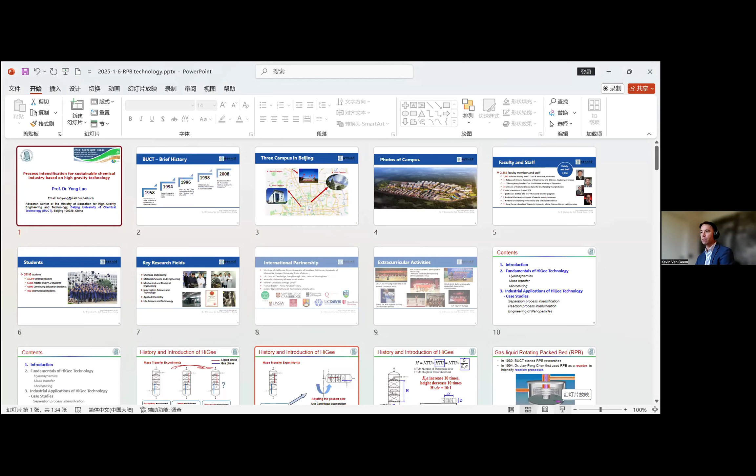Thank you so much, and thank you to the president of EFCE and also the chairman of the process intensification and the chairman of the chemical reaction engineering for the invitation. I'm so glad to have this opportunity to give a brief introduction of this Higee technology at BUCT. I hope that everyone can see my screen and also that the voice is okay for you. If you find that the voice is not so good, just let me know.

Okay, so I will start my presentation. I am Yong from Beijing University of Chemical Technology, we call it BUCT, and my presentation is called the process intensification for sustainable chemical industry based on high gravity technology.

Today I'd like to first take 1 or 2 minutes to give a very brief introduction of BUCT. We were founded in 1958. At that time in China, we call it the 211 program, which means that BUCT is one of the top 100 universities in the whole of China, because in China we have more than 5,000 universities. We have 3 campuses, and the oldest is this East campus here, and this is the photo of our campus in BUCT.

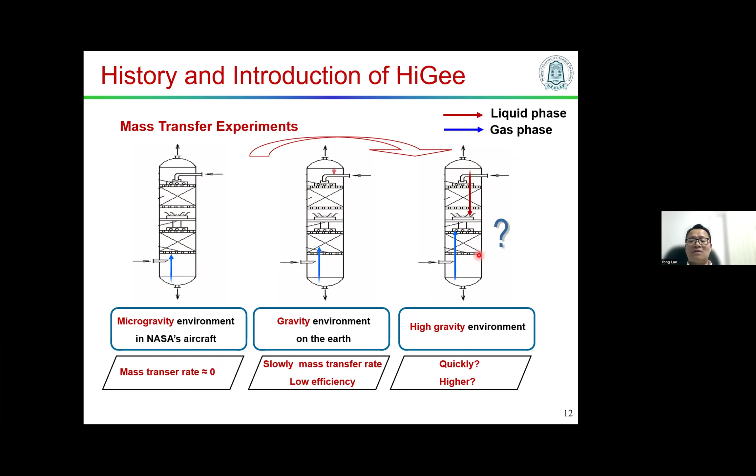Then people started thinking about it. If you could speed up the liquid flow rate or velocity, it means you increase the driving force for the liquid, and maybe you can speed up or increase the mass transfer rate. That is the original idea for the Higee introduction.

So how can we get this high gravity environment? People thought about it: if you rotate this packed column 90 degrees, then fix this column on a rotating disk, it means we can rotate the column. So the liquid will have an increased force, and another force for that is the centrifugal force. It means we can use this centrifugal force instead of gravity force. We call this device the rotating packed bed, shortened as RPB.

In the past, people found that with this RPB device, we can enhance mass transfer by 1 or 2 orders of magnitude. So we call this new technology Higee, meaning high gravity. High gravity is the technology name, but we call the devices RPB.

So how about this RPB, what can it be used for? When we go to the textbook, we find that if you're designing a column, there are 2 very key parameters.

The first one is that we need to identify the diameter. The diameter is commonly determined by the capacity, meaning how much gas flow rate you need in order to design the diameter.

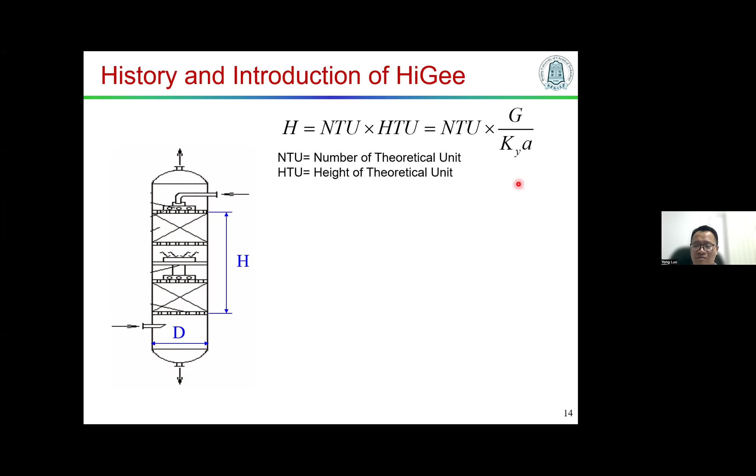We call it KYa. So for these equations, if you can increase the KYa by 10 times, you will decrease the HTU by 10 times. This means in the RPB, if you can increase the KYa, the mass transfer coefficient, by 10 times, you will decrease the HTU by 10 times, so the height H will decrease by 10 times. It means where you need 10 meters height in a conventional column, the RPB only needs 1 meter.

So it means we can reduce the size of these devices. Another thing is if we can increase it by 100 times, maybe you can decrease from 100 meters to just 1 meter. So this is the way to do the calculation, the principle of this RPB - why this RPB technology, this Higee technology, can decrease the size of the devices.

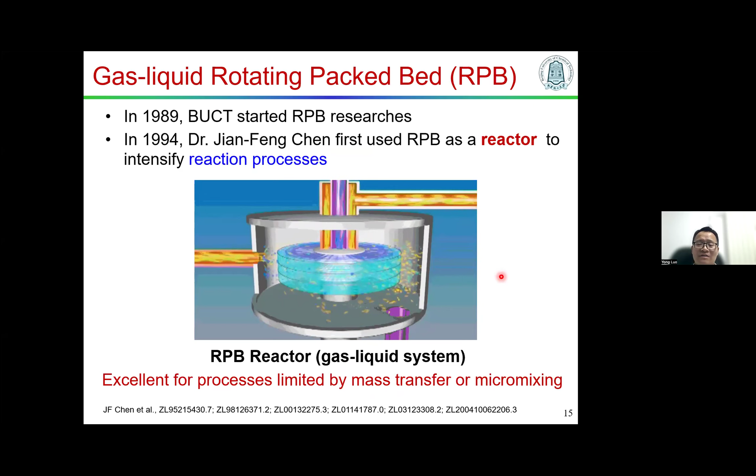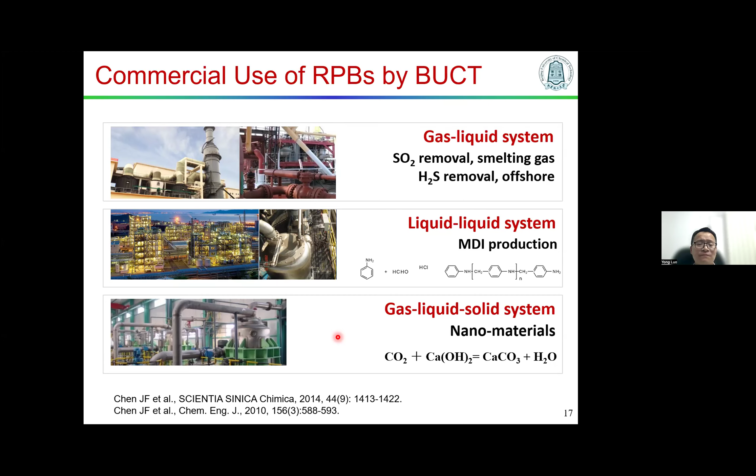I'll spend a little time going through the fundamentals of this Higee technology. Any technology takes time to go from the lab to industry - typically at least 8 to 10 years. This Higee technology at BUCT was the same - it took almost 10 years of fundamental research covering hydrodynamics, micro-mixing, mass transfer, and reactions. BUCT has published more than 600 papers and holds 115 patents on this.

We use high-speed cameras to look inside the packings and see how the liquid breaks up into liquid film, liquid ligaments, or droplets. We also calculate the size of these droplets and study the distribution of the liquid droplets.

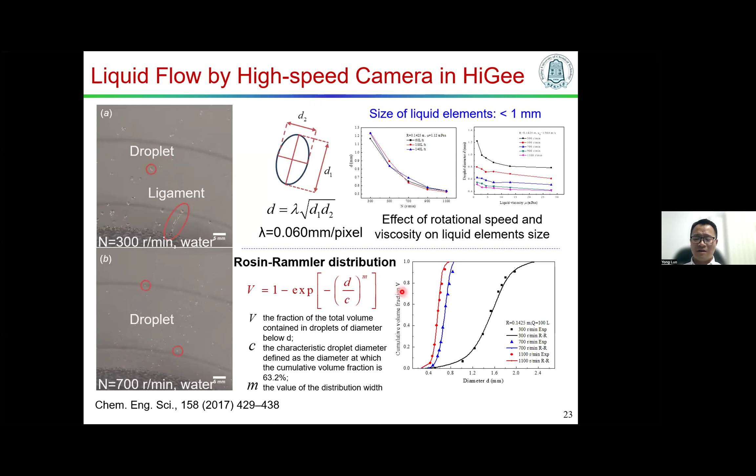Because the RPB has rotating characteristics, sometimes conventional technology can't show us what's happening with the liquid at the inlet. So we use CT X-ray to look inside and see how the liquid is distributed, getting data on liquid distribution and liquid holdup.

Another thing we do is use CFD to simulate the liquid and gas flow inside the RPB, which gives us pressure data and helps us find special phenomena.

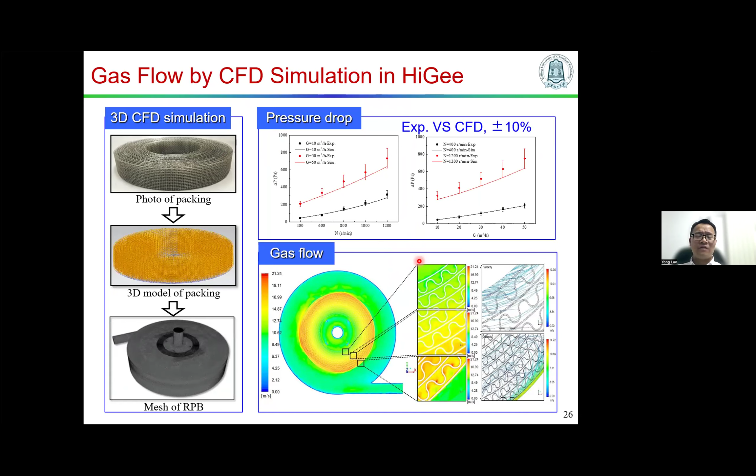For the mass transfer models, we divide them by viscosity into three models: for low viscosity, we use droplet models; for medium viscosity, we use surface renewal models; and for high viscosity, we use film models.

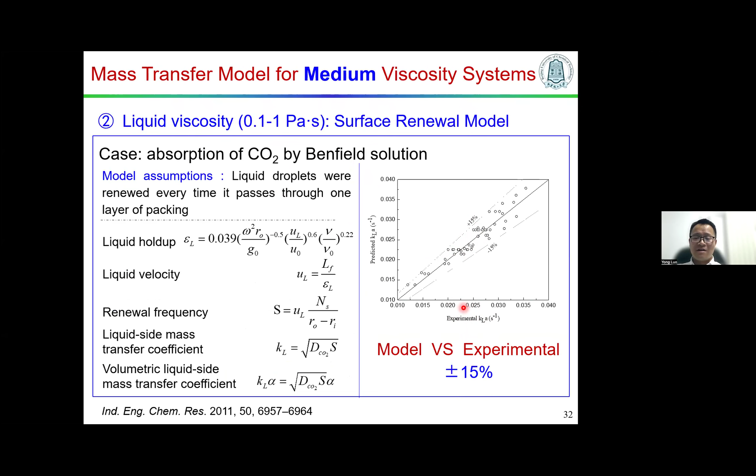With low liquid viscosity, like in CO2 capture, we use droplet models and the deviation is about 10%. With medium liquid viscosity, the deviations and errors are a bit bigger. And with high viscosity models, the errors are even bigger than that.

I'd like to say, regarding viscosity of the fluids - sometimes we can get very correct physical and chemical properties and parameters, but sometimes we use correlations to calculate viscosity, density, and other things. Even when treating high viscosity liquids, these properties can change a lot due to rotating motion and shear force. So viscosity changes a lot, and density too - any physical parameter can change, leading to higher errors.

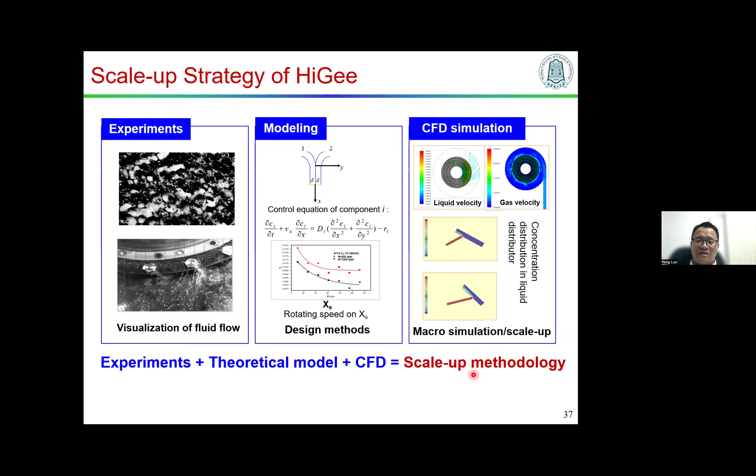We are also building micro-mixing and reaction models to build reactor models. I think the fundamental research is most important for scale-up, because if you want to go to industry, you need the know-how to scale up the RPB and design RPB reactors or separators that fit industry processes and meet requirements.

So now I'd like to share some industry applications of Higee technology - cases in separation, reaction, and also nanoparticles. First, let's look at the application in separation processes.

For this RPB or Higee technology, the first application was a 1983 paper on a pilot test using RPB for continuous distillation. But there they used two RPBs to finish the continuous distillation, because one RPB handles the stripping and one handles the rectification.

Using two RPBs to replace one column was a concern for people, because you have a lot of connection pipes and valves, and you need to be very careful with the control. So BUCT in 2006 thought about using one RPB with multiple rotors for continuous distillation.

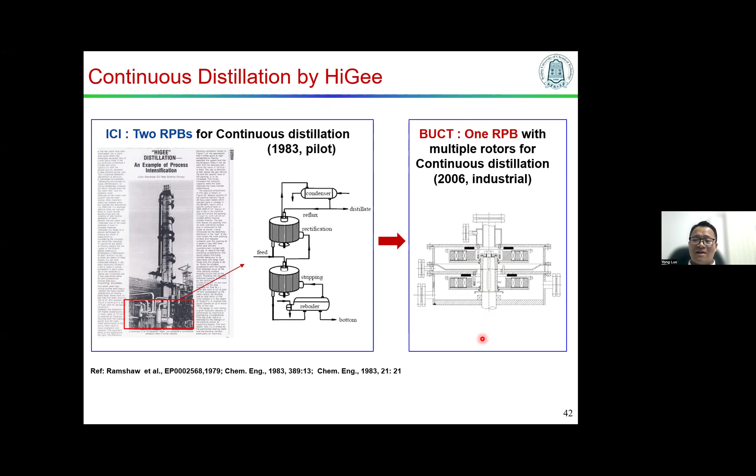I also know that another university in China, Zhejiang University of Technology, invented the RZB also for distillation. Both of us use one RPB to replace one distillation column. If you use one shell with multiple rotors, clients will accept this technology much more comfortably, because it's still just one device, similar to the conventional technology being one device.

We also see, I don't know if this is a conference paper or academic paper, from 1997, where people wrote about a vision from the UK that maybe by the 2010s we could put all the big columns inside houses.

So I think at BUCT, we really put this RPB inside houses, so the dream came true.

Here is the conventional column that we replaced with a very small RPB. The orange column's height is almost more than 21 meters, but our RPB is only about 3.6 meters in height. We used this for methanol-water separation by continuous distillation, with a capacity of about 50 tons per day.

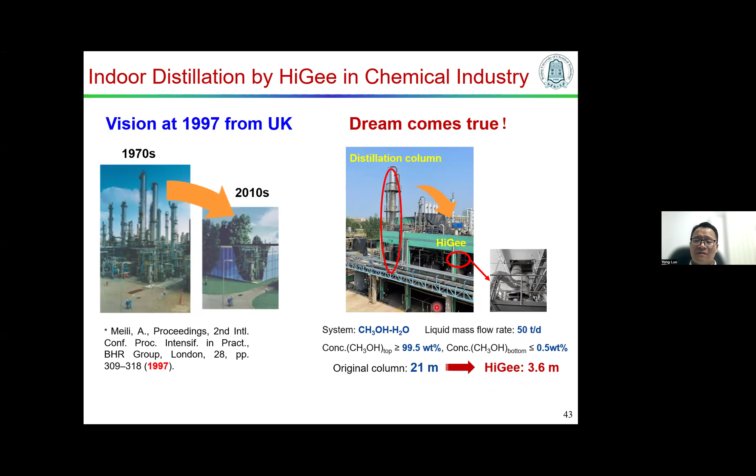We also make a lot of these skids, which we call RPB distillation skids, for clients. Because the RPB is small, you can do the fabrication entirely in the fabrication shop to build a skid, then just transport the skid to the factory to finish installation. This way we save a lot of money on transportation, fabrication, and installation.

Imagine building a column on site at a chemical plant—because the column is very big and tall, sometimes you need to fabricate it on site just to save the transportation fee. But for this RPB, it's very easy for us. We only need to do the fabrication and commissioning in the fabrication shop, then ship it to our client.

Even for this RPB, because it's much smaller, the liquid hold-up is also smaller, so we can decrease safety issues since liquid hold-up decreases a lot.

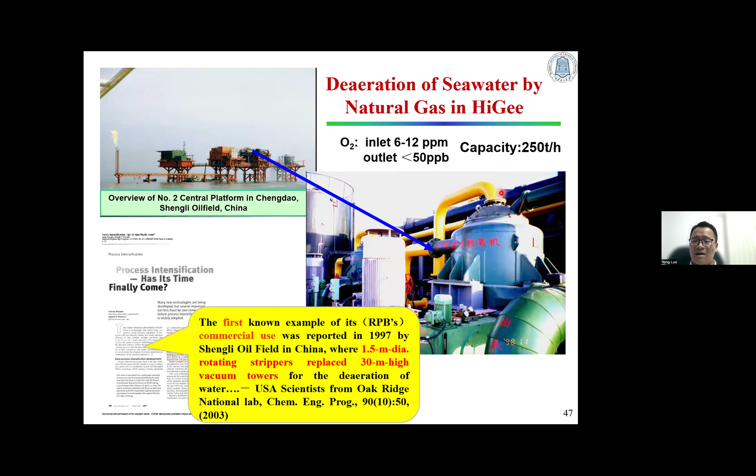Later we also did some projects with 500 cubic meters per hour, meaning 500 tons per hour of seawater. This was also for removing oxygen from seawater, used for an FPSO, with the RPB removing oxygen from the water for EOR.

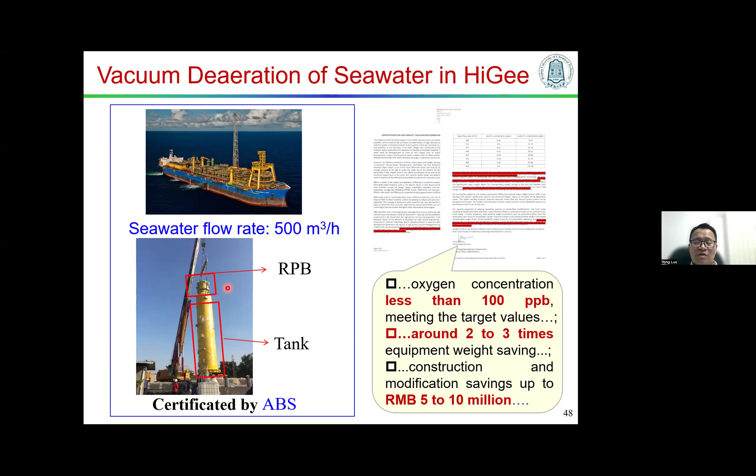Another case is that we used an RPB offshore to remove H2S from natural gas.

In China, in the past, people were burning coal in the north of China. But in order to protect the environment and the air, the government asked all the people to burn natural gas instead.

So it means in China, all the state-owned companies should recover all the natural gas, because we don't have so much natural gas. We even buy natural gas from Qatar, Russia, America, and Australia.

But right now, the government asks all the people to recover this natural gas. To do that, you need to remove H2S, remove CO2, remove water, and do a lot of purification. Then you can get this natural gas.

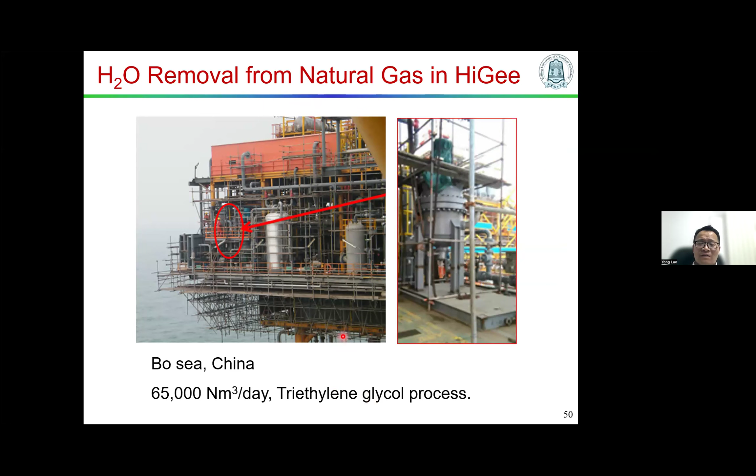We also use RPB for water removal from the natural gas. This is in the China Bo Sea, and we use the TEG to remove water on these platforms.

One month ago, I went to this platform because this RPB has been used for 8 years, and the client wanted to do some maintenance. So I went to this platform - you see here, these are some rooms used for people to live, and here is the helicopter platform, and our RPB is installed here.

Okay, so this is here.

Just say 3 more minutes if it's possible. Okay, how many minutes left? 3. 3 minutes. Okay, yeah, yeah.

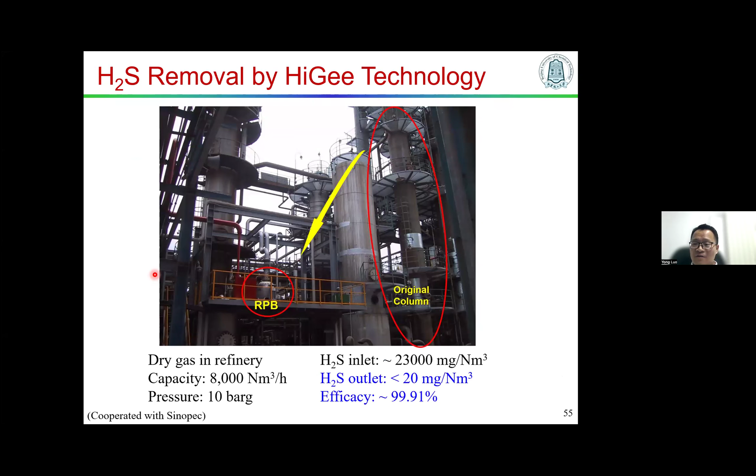For the reaction cases, I can give you some examples. The first one is the MDI reactions. We use RPB to do liquid reaction with condensation reactions for these processes, and we put this RPB in the plant.

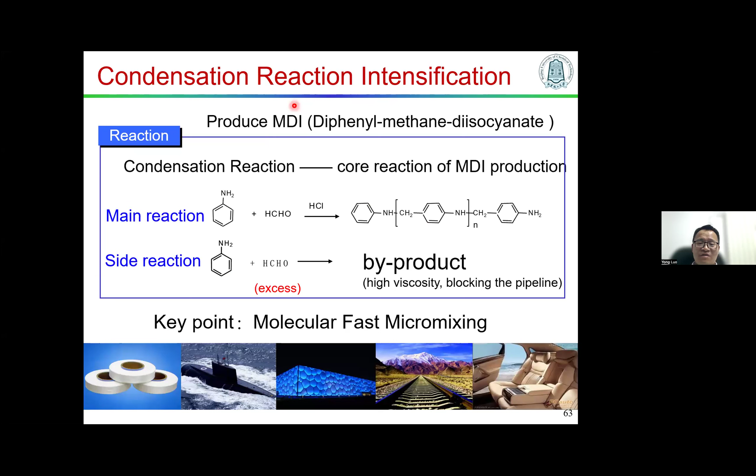They have 1 million tons of MDI products. This is the product using the RPB technology.

Another one is for LPG sweetening technology, where we use the RPB for these processes, and we've put it into commercial use.

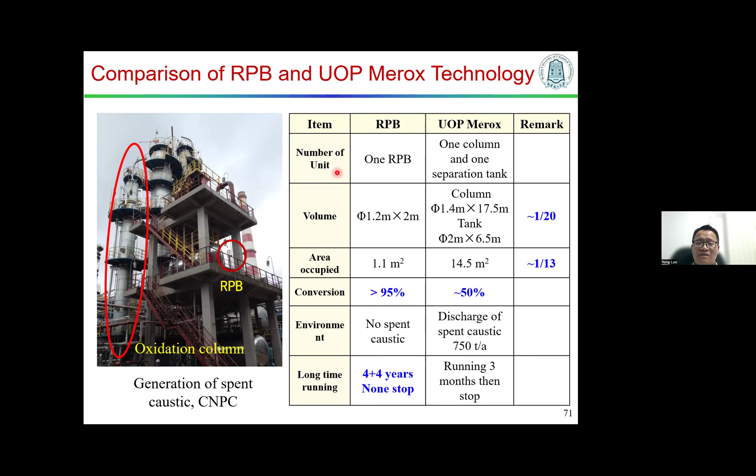We also did some comparison with RPB versus this UOP Merox technology. We use one RPB, but Merox used one column and one tank, and we think the volume is greatly reduced with our approach.

We got some promotion using the line intensified scale-up RPB in this refinery process.

Some nanoparticles - I think this one people may not care about as much - we also use this RPB to produce these nanoparticles using Higee technology.

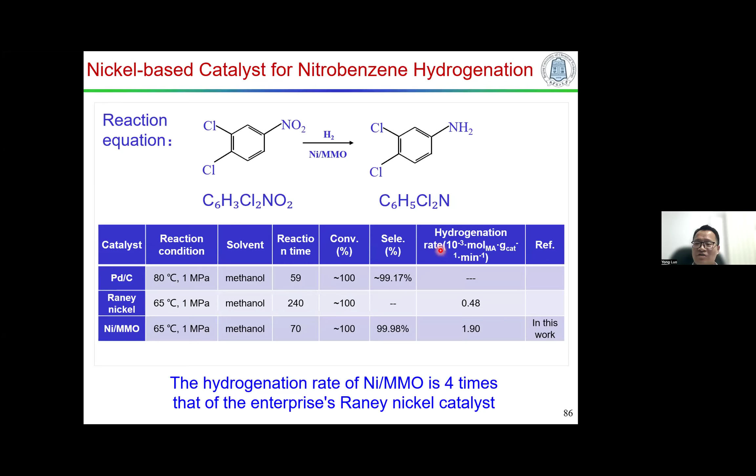We also do some work with zeolites, VPO catalysis, and hydrogenation catalysis for that.

So the last information is about CCUS. We do a lot of things with CCUS, using RPB to replace the column. We have lab scale, pilot scale, demo scale, and commercial use of these RPBs. Until now, BUCT has around 200 industry application cases across all different kinds of processes.

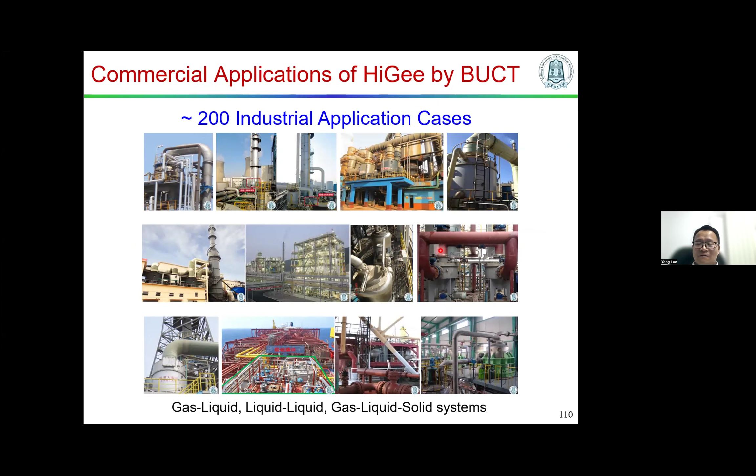Thank you for a very nice presentation. We have a question in the Q&A part: what is the comparison of operating costs for a rotating packed bed compared to a conventional column? For example, if you compare for CO2 or H2S applications, what is the difference in cost?

So CapEx, okay, thank you chairman for your question. For the operation costs, I think we can give the example of CO2 capture. Because for this RPB, you can shorten the size and volume of these devices, which means you can reduce the liquid holdup inside. So if you use MEA, you can reduce a lot of that solvent. But this is the fixed investment, not the operation costs.

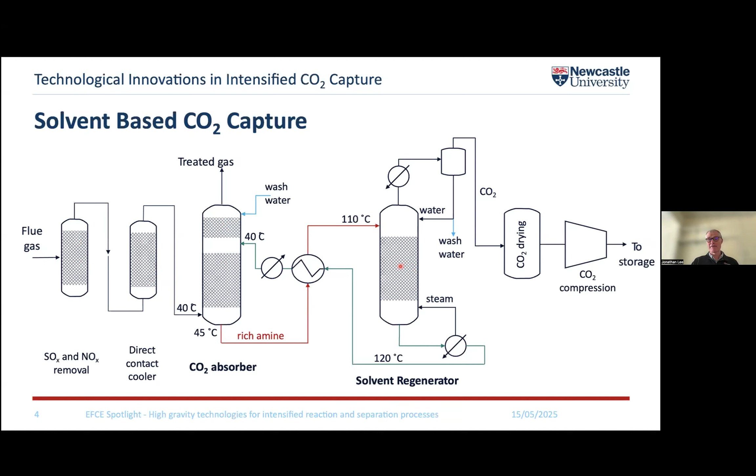These are all packed towers. The flue gas pretreatment, the absorber, the water wash, and the desorber are all packed towers. Therefore, if you want to intensify a solvent-based CO2 capture process, you're looking at using rotating packed beds to replace all those packed towers.

So for the last 11 years, I've been working with a company called Carbon Clean Solutions, based in the UK but now quite international. They have now got commercial processes—they call it Cyclone CC. This is the 10 ton per day unit in the picture there. Basically, that 10 ton per day Cyclone CC intensifies the absorber and regeneration columns. The gas pre-treatment and water wash are done in conventional columns on this particular process, and you can see those in the background of this plant. But that is commercial—Carbon Clean have sold commercial units besides building this 10 ton per day test unit.

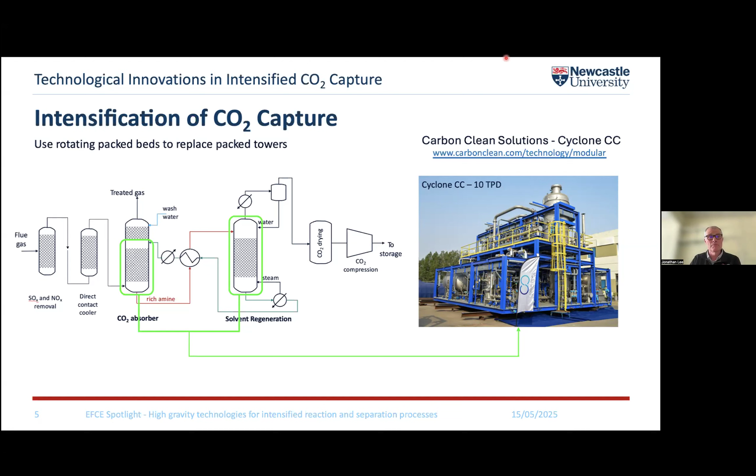Now they're moving on, developing this Cyclone CC technology further, where they intensify or use rotating packed beds to replace all the packed columns in a carbon capture process. And actually just today, they've made an announcement about this process and the successful testing of some of the RPBs for that—if you click on the link, you'll get there.

Now, there are some other players in this market. Baker Hughes have got a development of rotating packed bed technology from Norway, and they've actually intensified or used rotating packed beds for the absorber and water wash. They've also got a design for solvent regeneration which integrates the reboiler into the regeneration column, and I'll talk a little bit more about what we're doing in that area later on.

This is a cross-flow RPB, so it's not counter-current flow where the gas and the liquid are flowing opposite directions. The liquid still flows in the same direction as it does in the conventional rotating packed bed, but the gas flows across the packing, which allows them to basically build the absorber and the water wash into a single unit.

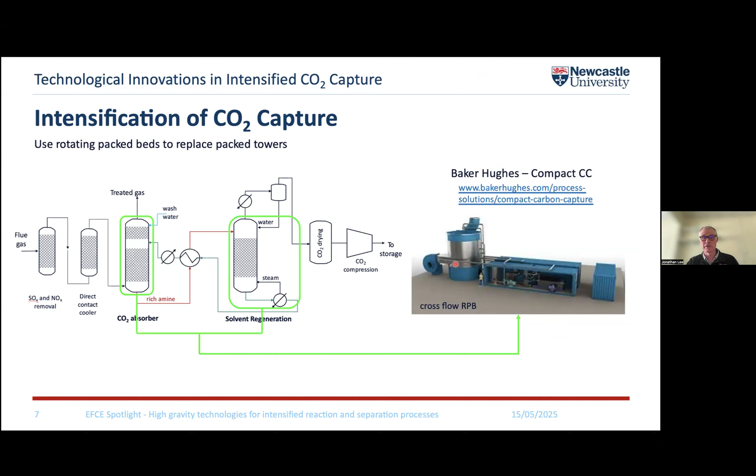And then finally, I'll talk about a project that I'm currently involved in. This is a European project called Higee Accord, and we're basically intensifying the absorber, and we've got the solvent regeneration column, which we're intensifying, and we're integrating the reboiler into that intensification. There's a picture of it on the right—it's being built down in Yorkshire in the UK. If you click on the LinkedIn symbol, you'll be able to see a time lapse of it being built.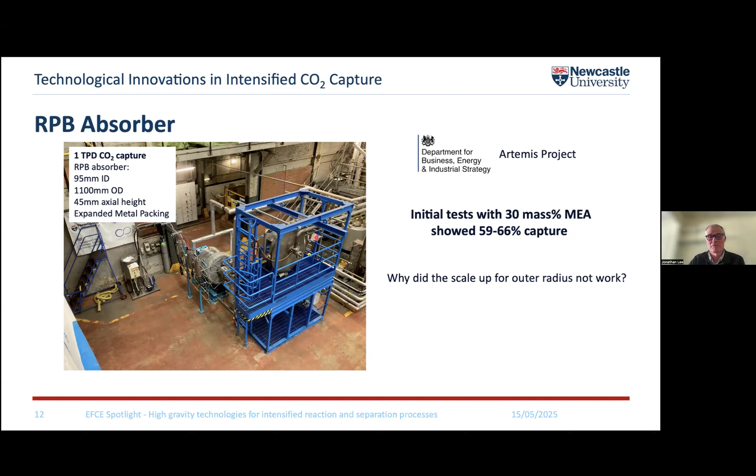So why did that scale-up for the outer radius not work? I'm going to make reference to work coming out of Beijing here, because they have done a lot of measurements. There are three mass transfer zones within an RPB: the entrance or end zone, where the liquid comes in; the bulk zone, which is the rest of the rotating packed bed; and the cavity zone, where the liquid leaves the rotating packed bed and flows across to the outer wall of the casing.

Measurements indicate that the mass transfer rate in the entrance zone is at least 4 times higher than the mass transfer rate in the rest of the rotating packed bed. So we've got this very intense zone of mass transfer right at the entrance. In the cavity zone, the mass transfer rate may be slightly higher, but it's generally around about the same rate as the bulk zone.

And the reason for that very intense mass transfer in the entrance zone is because the liquid jet is impacting onto the rotating packing, and that jet is being fragmented as it collides with the rotating packed bed. That's what gives us the very high rates of mass transfer in that entrance zone.

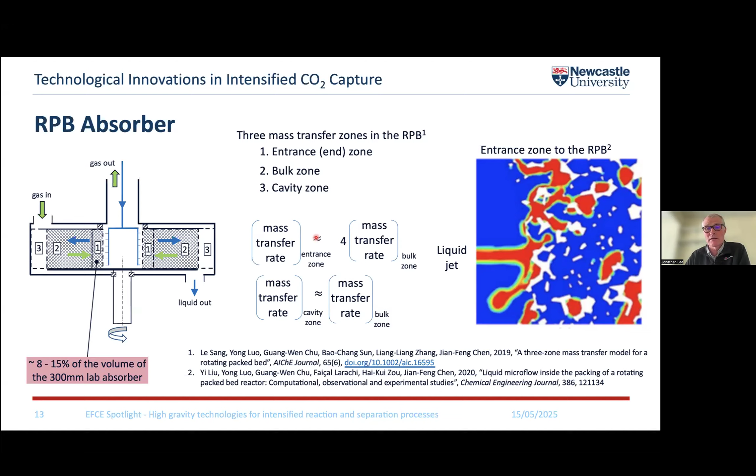This is a very approximate calculation, but we think that in our 300 millimeter diameter lab scale absorber, the volume of the entrance zone is about 8 to 15% of that rotating packed bed. So that entrance zone is having a significant effect on the measurements we take from that small scale rotating packed bed.

The other thing that's going on in this CO2 capture process is basically the reaction between the CO2 and the amine. So there are two sets of reactions. One is where the CO2 is getting transferred to the solution, which is the mass transfer process, which is very fast.

We have the amine reacting with the CO2 in solution to give us a carbamate and water, and that's a very fast reaction. The amine is also helping to catalyze the mineralization of the CO2 by making the environment alkaline, and those are still very fast reactions, but slower than the carbamate reaction.

When we did our work to develop our correlation for the rate of CO2 absorption, we were working with amines at low loading, so we were seeing basically carbamate formation dominant, and the rate of reaction was much faster. If you look at the overall mass transfer coefficient, it has a gas film element and a liquid film element, and the expression for the liquid film reflects the enhancement caused by having a reaction going on in the liquid phase.

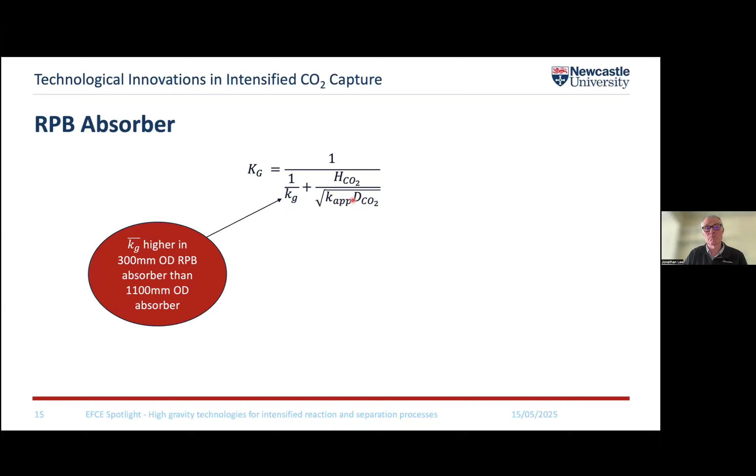So Kg is the film mass transfer coefficient, and k app is the apparent reaction rate. In our 300 millimeter absorber, the average mass transfer coefficient was higher than we'd see in the 1100 millimeter absorber, and the reaction rate is also higher. Those two things together mean that the data we used to scale up to the 1 ton per day CO2 absorber underestimated the outer diameter, because we were overestimating the overall rate of mass transfer.

Now, the project to scale up to 1 ton per day was a commercial project, driven by a company, and they don't want to accept 60% capture. So we had to think of something, had to change something to try and get to 90% capture.

So we used some work published from Germany in 2021, looking at the liquid distribution in a rotating packed bed. On the left, this image shows the liquid in red, its volume fraction as a function of radius, for a packing whose porosity is constant, so the pore size is the same throughout. You can see we get good liquid distribution, but the volume fraction of liquid decreases very rapidly with radius.

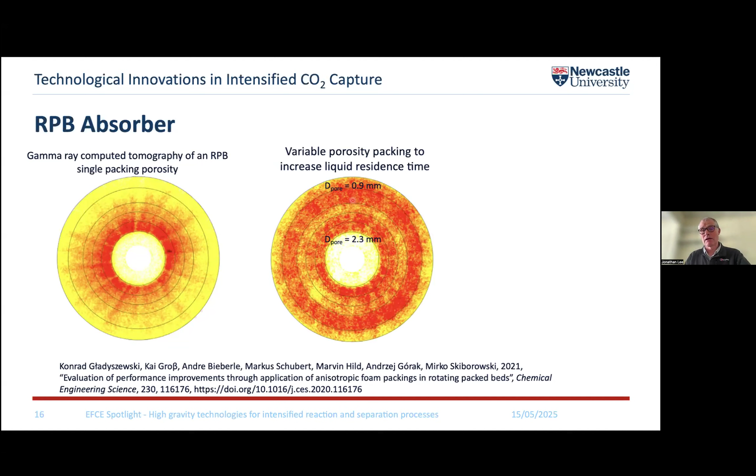If you do that measurement again but use packing that has variable porosity, where the pore size goes from 2.3 millimeters down to 0.9 millimeters, then as you decrease the pore size you hold up more liquid in the packing. That gives you more residence time because you're slowing the liquid down. So working with Montz, we developed that variable porosity packing.

You can see the picture of the rotating packed bed on the left and right here. Here's some data taken from the 1 ton per day scale absorber. The orange line is when we're using the Expamet, and the blue line is when we're using the Montz variable porosity packing. You can see the Montz packing gave us a greater percentage of capture, because we've increased the residence time.

Now, we still didn't get to 90%. This is with 30% MEA solution. We were doing this project with Carbon Clean, and they have a solvent called CDR Max, which is kinetically faster than MEA. So when we used their solvent with this rotating packed bed, we were able to achieve 90% capture, which is what Carbon Clean wanted.

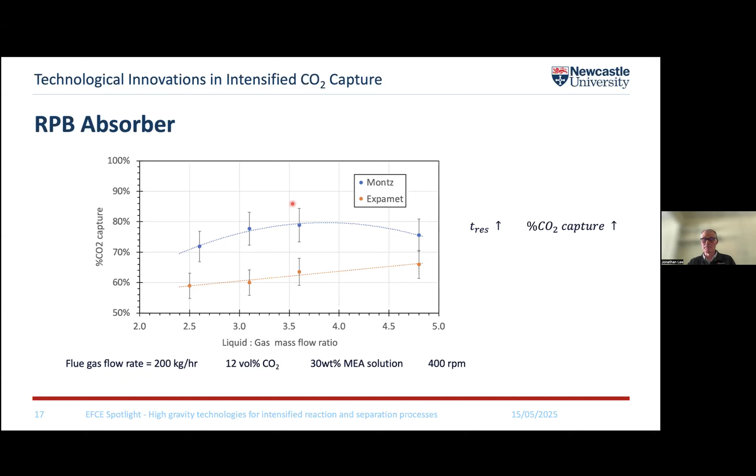These rotating packed beds are 380 millimeters ID, 1,990 millimeters OD, and 185 millimeters axial length. They're being built into a process which will be ready to be tested in Greece by about August this year. Now, you can also intensify the solvent regenerator.

If you're using a rotating packed bed, you can reduce the packing volume by a factor of at least 30. That poses the question: if you've shrunk the RPB, rather than having a separate heater outside to put energy into the system, why not directly heat the RPB rather than having a conventional reboiler sitting out there? So that's what we've set about doing.

So here is a schematic of what we call the integrated stripper and reboiler. You've got a rotating packed bed that is completely encased in metal, sitting inside a metal shell, which is sitting inside a pressure vessel, and the metal shell is heated directly by steam.

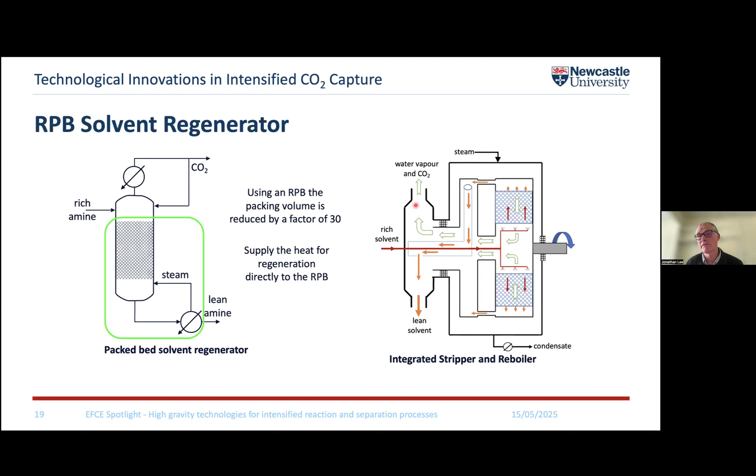So we get size and capital cost reduction due to intensified mass transfer, intensified heat transfer, and integration of the regeneration in the reboiler. And we get reduced energy consumption by integrating the reboiler and the regenerator.

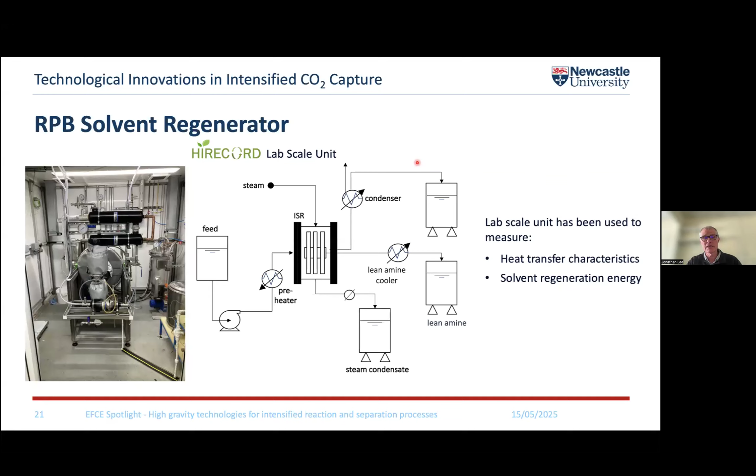So we tested this at lab scale, where we measured the heat transfer to the rotating packed bed and also the solvent regeneration energy. We've developed correlations for heat transfer to the liquid inside the rotating packed bed, doing that for water and for a solution representative of the most viscous amine solvents we might encounter. We also measured the regeneration energy for MEA.

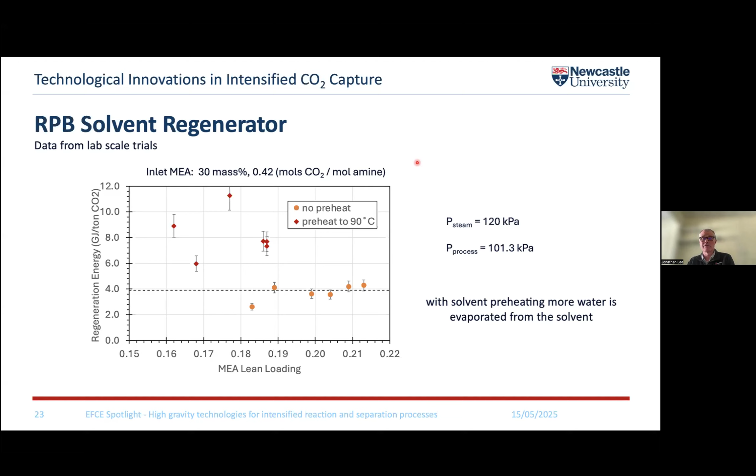But you can see here, the dashed line is what we'd expect the regeneration energy for MEA to be, and we're either on that line or just below it when using the integrated stripper and reboiler.

Basically, we've used that data to scale up, and this is the integrated stripper and reboiler being installed on the Higee core process around April time this year. And that's all I've got to say.

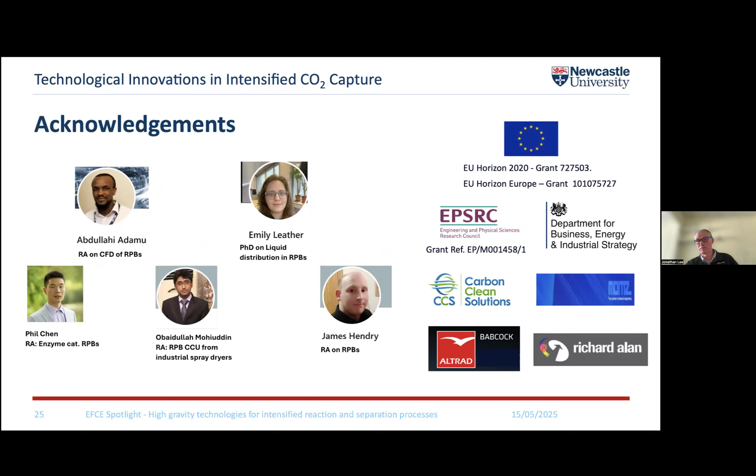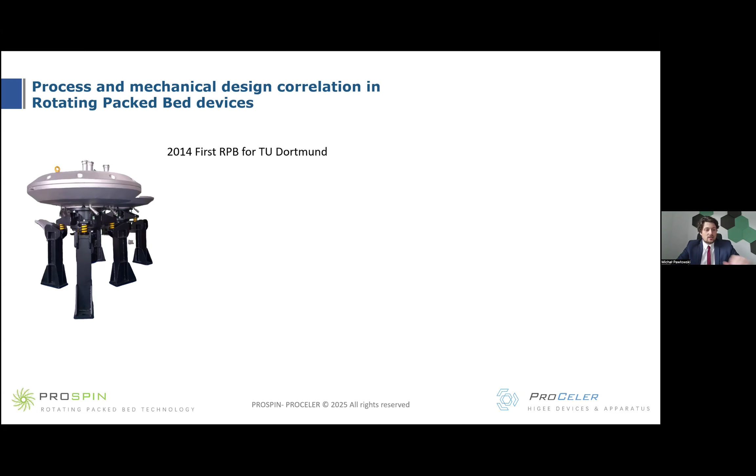Since then, during the last 10 years, I have provided 18 devices, and what you can notice here, I mark by the same color the devices that were designed with exactly the same design. Usually each device is slightly or much different, not only because of mechanical improvement. Of course we get feedback once we design something and see how it behaves in real conditions, and there's influence of mechanical solutions on the chemical process that we can improve. There were also changes in size. But it's very important to find the proper solution for the specific use, specific process, specific chemical system. Especially lab use is very demanding because it's quite universal, which is of course impossible to make all-in-one, but I'm trying to do it.

So, how to design an RPB? This was the first question I asked myself. We can split it into two aspects, not independent, but at the beginning, let's say we have an example of a column. We need to lay it down. Of course we need to revert the dimensions: height became diameter, and diameter became the height of the packing. The height became the length of the packing, but in fact the length is not the radius.

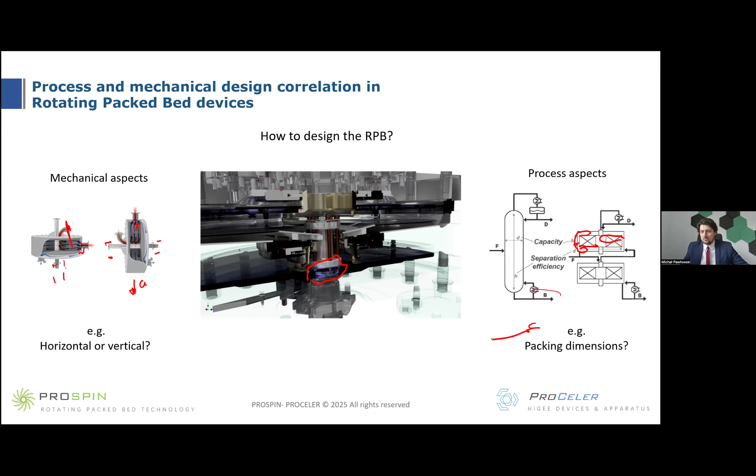So at some dimensions that we came from here, we can think about different arrangements, even in that simple case it might be horizontal or vertical axis. So in general, it has mutual influence with both, and we can investigate and look for proper solutions for specific fields of use.

This is our device that we have in our lab. I would like to show just one thing related to the topic I touched on in another slide. What happens if the drops eject the rotor? It hits here and splashes into some fog, let's say. It depends on rotation speed, on the viscosity of the liquid, maybe some surface tension, many parameters.

So we can have different phenomena, casing phenomena, if we use different systems and even different process parameters. What we can observe, for example, is the creation of a wave of liquid on the casing that is dragged by the gas, by the rotor, and rotates with the rotor. It causes an extreme increase of power consumption and switches off the motor by overcurrent mistake. But anyway, we can use stream breakers like this here.

That gives us the opportunity to drain the liquid faster, but it's not always advantageous. Maybe at some processes, at some parameters, we can increase the liquid holdup in the casing to use the advantages of perfect mixing inside the casing. We have quite perfect mixing, good mixing that we have checked, and it's really good mixing inside. So this is one of the different approaches we can have in different processes.

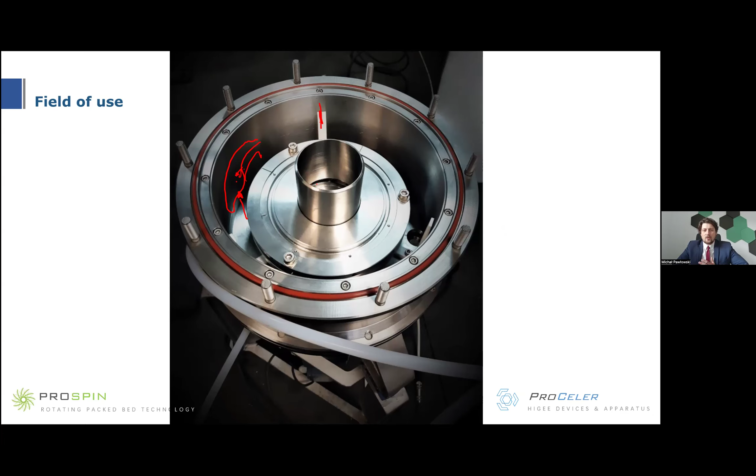What is also important to observe here is that this is a very small device. It has just 100 to 250 millimeters of rotor diameter, and we use it for proof of concept of different processes. Of course, if we look at the big scale process with great absolute amounts of gas and liquid, like absorption of CO2 for example, it's far away from even piloting scale.

But we can make some screening of the solvents. We can make some tuning of the model, a first point of some curves of the model that we built for calculating the packing and efficiency of the process. One important thing here is the packing height, and here is the packing radius. So the volume inside the casing is more than one order of magnitude higher than it would have in normal scale, because we would like to make it smaller. So the relation between packing volume and casing volume in absorption process, especially CO2 absorption, will be opposite.

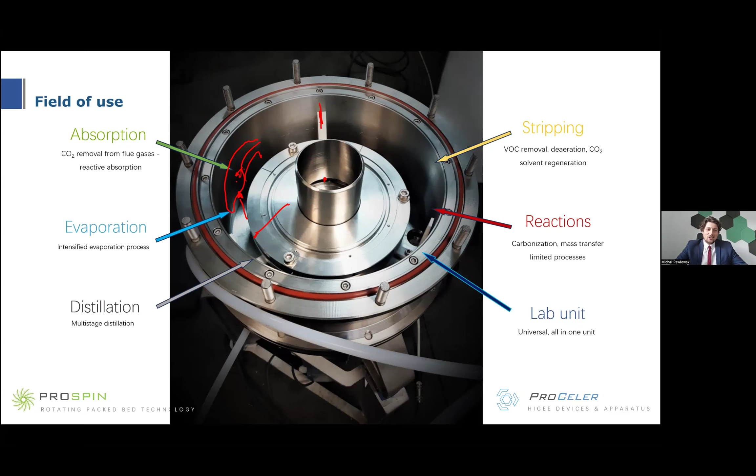Below, I would like to show you some results that we obtained related to absorption of CO2 with MEA. The point is that if we want to use RPB in CO2 capture, it's also worth using RPB as the stripper. This should work in a closed loop, and this stripping RPB will be a completely different device. Turns out it's completely different than the absorption RPB.

What we can observe here is that with similar amounts of flow rates, when we double the flow, we still have the same efficiency of capture in stripping. So this shows some untapped potential in this small device comparing the capture efficiency of CO2. Yes, the device for stripping will be much smaller, as we can observe from the existing installation.

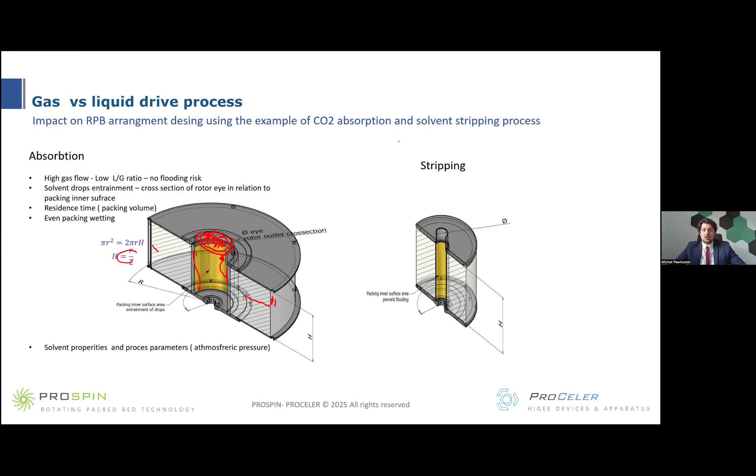What next? It's the solvent parameters and the parameters of the process. It's good to have atmospheric pressure because of the efficiency, in terms of energy consumption, because any compressor will have much higher consumption than the RPB in this installation. There are some topics related with upscaling that I will come back to later.

If we look at the stripping device, we will have about 10% or 5% of gas flow, depending on the concentration of CO2 in the flue gas stream that we consider. We'll have quite a liquid load and risk of flooding at this surface, so we can decrease this area, but we should prevent the flooding by proper RPMs and proper surface area inside.

So when we look at the stripping of the MEA, the length of the packing required is not so high. We get this opposite relation compared to the absorption device, which also gives us the opportunity to put it horizontal. For example, as a disadvantage, the axis will be lower, not so high, but we'll have good access for maintenance.

Of course, additionally, we have temperature, pressure, or vacuum process differences in casing construction, sealing type, and many other points. We need to also think about heat exchange. What we already have is a heat exchanger inside the casing, and we have some solution to also build a heat exchanger inside the rotor that we haven't realized until now, but we are still doing it for serious upscaling.

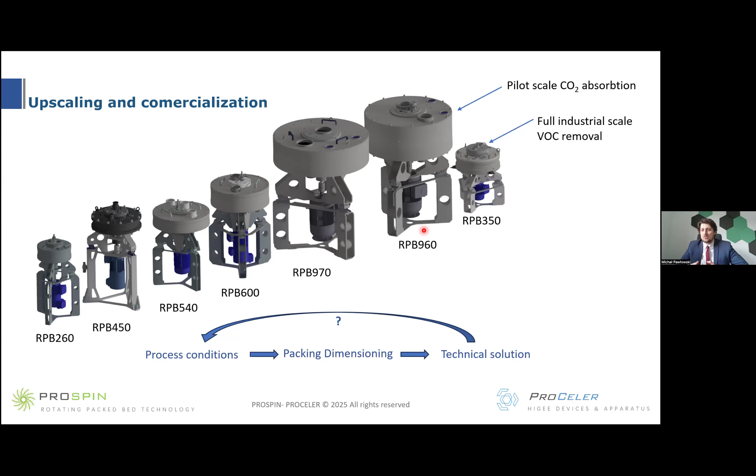This is what we are going to do next month. We are trying to build this kind of device and try it in a real process. It's also an opportunity if we find out there's something under this question mark. It's modular construction, so we'll be able to change it, adjust it, improve the device and adapt it to a process that is not fully known, especially using RPB. This is also an opportunity to convince production guys to use RPB instead of a well-known technology, maybe not the best or most efficient, but still well-known. So that was my idea.

In this scale, RPB for CO2 capture looks like this. It's huge, and it requires a different approach to mechanical design. You can see here that we can reverse it upside down. Here is the motor; opening the lid is rather useless with this tonnage, and we hang a heavy rotor inside. The optimal range for this kind of device will be rather 500 RPM down to 200, depending on the radius, but for this radius I expect something like this. It gives us a lot of questions about the resonance speed of the support, which is also something we need to answer in the mechanical solution.

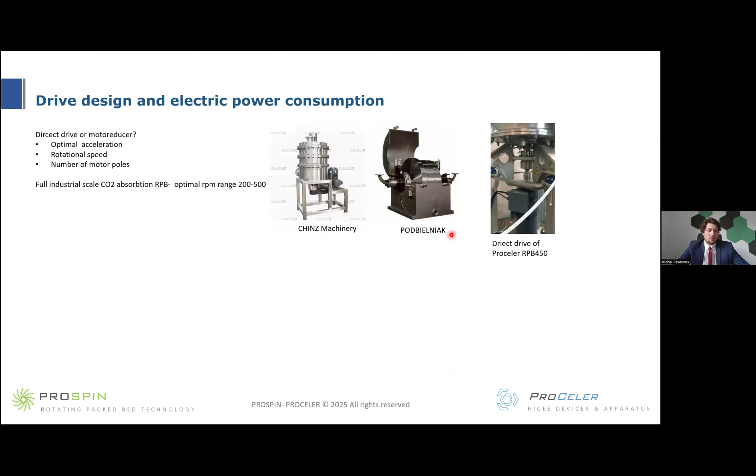One important question, which became most important for the final user, is power consumption, especially in CO2 capture. It's not so obvious how we should calculate the optimal configuration. We know there are some belt transmission RPBs, like this old Belgian one and others. We usually use direct drive, and if we want to go with lower RPM, we can use multiple motor poles, but we need a reasonable number in terms of availability on the market. I think finally we need to think about a gear reducer, but still, what is the power consumption? It's not so obvious. We have a quite well-known equation from TU Dortmund, and it's not so obvious what this factor is - of course it's related to the unit, but this is idle power.

If we take a simple model of energy consumption, which comes from the velocity of drops ejecting from the rotor, we can calculate the energy of each drop. After trivial transforms, we get an equation which is exactly this, in fact. But this assumption assumes that the velocity of the drops equals the velocity of the rotor - which it's not, obviously. It depends on viscosity, maybe surface tension, and definitely on packing type. If we want to build this model and make a correction factor, we should put it somewhere in the radius, which is squared. Because if we observe some radial velocity and smaller velocity in this linear component, it's definitely something that decreases the power consumption.

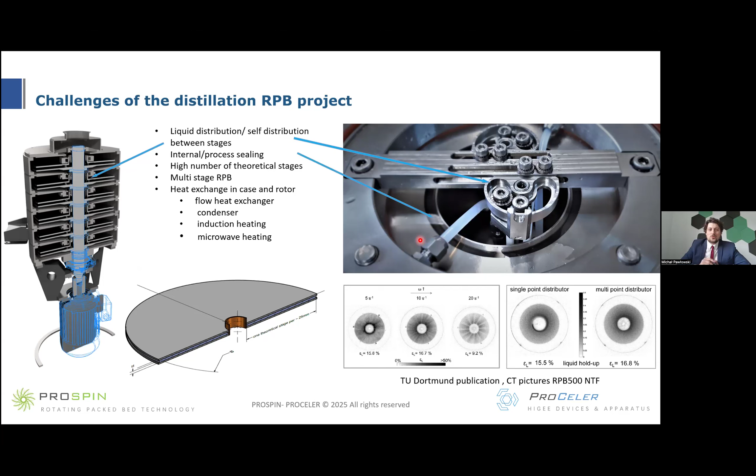We are still looking for good solutions, and we are testing our devices and our solution. Thank you for your attention. There's a lot, of course - I would like to just highlight some fields of investigation where we can look for solutions, some stable guidelines on how to design, how to make something.

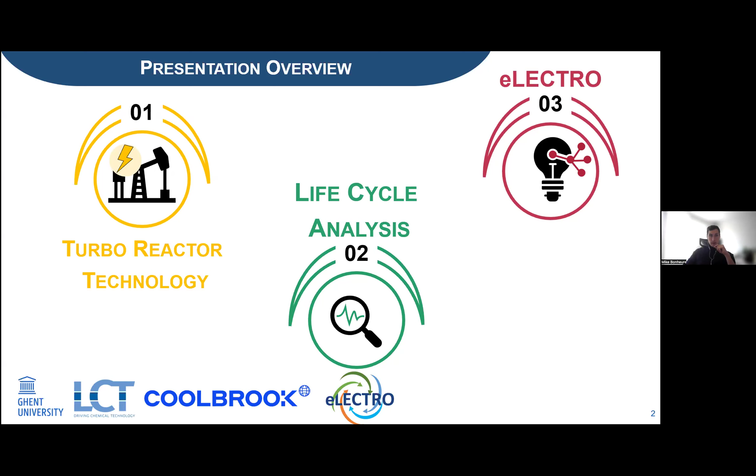But before I really can dive into turboreactors, it's important to level the playing field a bit and introduce you to the state of the art in steam cracking.

Basically, steam cracking takes a highly saturated feedstock, anything ranging from ethane to butane, or heavier naphtha feedstocks. In the past decade, we also saw a clear shift towards more sustainable feedstocks, ranging from biomass to plastic waste. We feed that feedstock into a massive furnace where we burn massive amounts of gas in order to reach temperatures of 700, 800, 900 degrees centigrade.

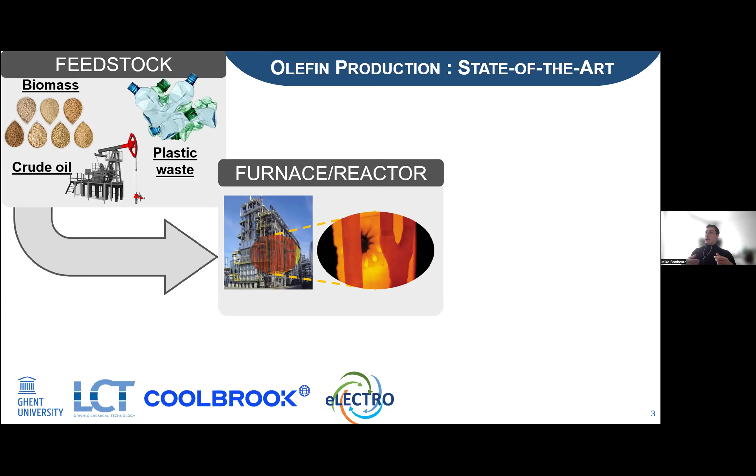Because under these high temperatures, the feedstock will start to decompose into smaller, economically more interesting components like ethylene, propylene, butadiene - components which we use in our everyday life. Just think about the tires of your car, the paint on the wall, and so on and so forth.

Of course, with that massive demand, because it's used in everyday products, the amount of CO2 emissions is also massive. We are talking here about more than 250 million tons of CO2 equivalents each year. So that's why electrifying this process is such a game changer.

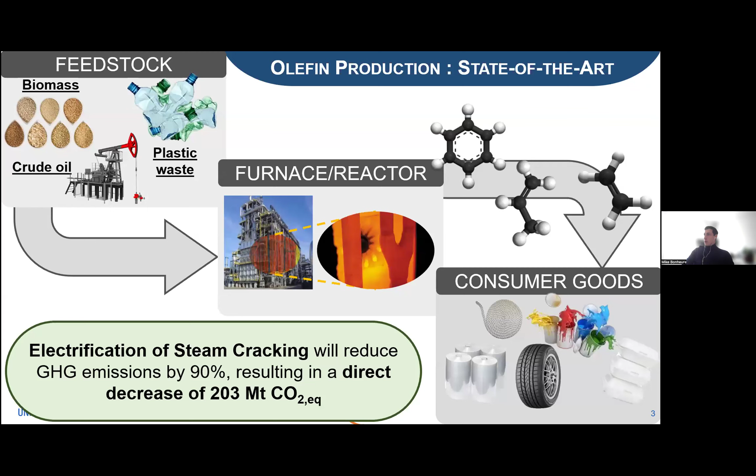By fully switching to electric heating, we are able to reduce the direct CO2 emissions by over 200 million tons on an annual basis. Of course, we are not the first ones who realized this.

As you can see from these snippets that I found online, there's been a clear surge in the past few years in R&D efforts, accelerating the development of e-crackers on an industrial scale. And of course, if you bring some of the brightest minds in the industry together to solve one single challenge, you know what will happen.

Because during that same period that those companies started R&D agreements, we also see a clear surge in new intellectual property filings. Generally, we can categorize them into 4 main categories, ranging from resistive heating all the way down to microwave heating.

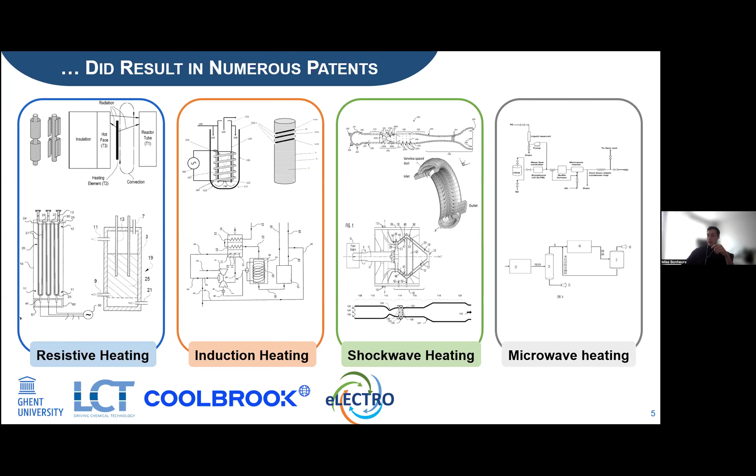But 2 of these clearly stand out in terms of activity in patent filings, and that is resistive heating and shockwave heating. Resistive heating, this is clearly where the big chemical players are coming in. They are filing multiple patents a year, and they are also developing multiple pilot plants as we speak. I think the most prominent example of that is the joint e-cracker project by BASF, Linde, and SABIC, who are currently running and testing a pilot at BASF Ludwigshafen.

And then we have shockwave heating. It's not being backed as we speak by big chemical players, but it's backed by big turbomachinery players like Siemens Energy, but also backed by a small Finnish startup company named Coolbrook. Even though I have a lot I would like to talk about regarding both technologies, I need to limit myself to only shockwave heating for the sake of time.

Now, what are shockwaves? Well, the simplest way to think about shockwaves is by just imagining a highway full of cars, all cars driving at 120 kilometers an hour, and all of a sudden, one car makes a very abrupt move. What will happen? Well, a massive collision. It's a local disruption of the flow of the cars on the highway.

And that's exactly also what is happening in supersonic flows. Basically, the flow at supersonic speed doesn't know what is happening in front of it. And all of a sudden, when particles need to move away because there is a sudden abrupt change in the geometry, a local disruption will take place, which we refer to as a shockwave.

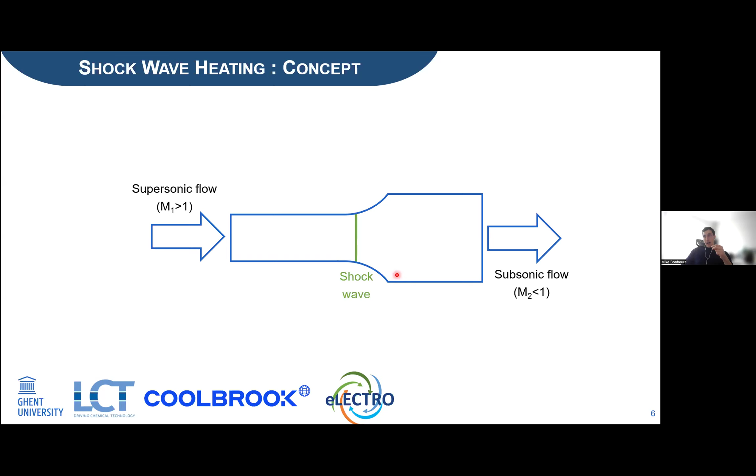And a shockwave has very interesting properties because if you look at this very small, almost instant, very local disruption, we also see that properties like pressure, temperature, density, and so on are changing almost instantaneously. When I'm talking about an instantaneous change, I'm really talking about change across several nanometers.

And that's very interesting because we can leverage this type of heating in order to increase our temperature by a factor of 2, 3, 4, and even higher, depending on our incoming velocity. And this shockwave heating is exactly what is used in the rotodynamic reactor. It's a turboreactor designed, developed, and operated by Coolbrook.

And indeed, these turboreactors are not merely theoretical in nature anymore because they are currently tested on pilot level, processing multiple hundreds of kilograms per hour and successfully processing various hydrocarbon feedstocks, including naphtha, but also pyrolysis oils.

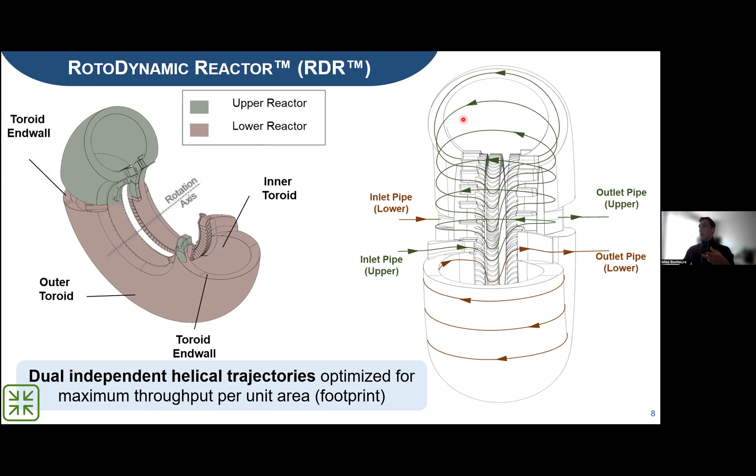Now, how does this unit really work? For that, we need to take a closer look at the bladed region. The RDR comprises three distinct bladed shapes: the nozzle, the impeller, which is rotating, and the diffuser.

The nozzle is basically the blade which accelerates and distributes the fluid parcels over the impeller. The impeller will add kinetic energy onto our fluid and accelerate it up to high subsonic or even supersonic level. And in the diffuser, this kinetic energy is diffused. We decelerate the flow in order to transform the kinetic energy into internal energy, allowing us to heat the flow from very cold to very hot.

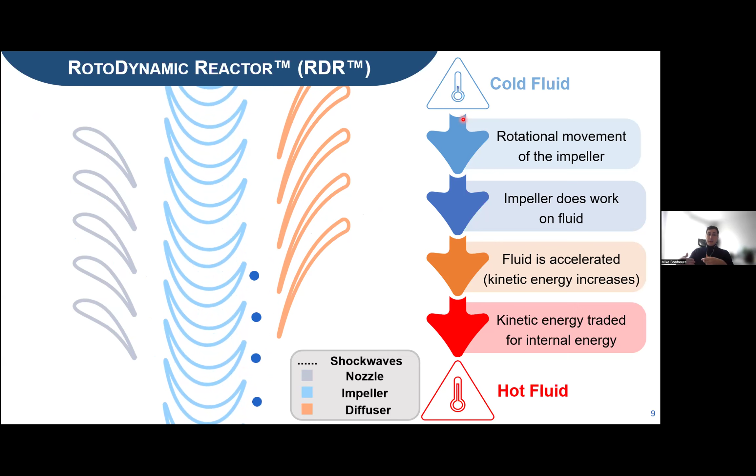So you can imagine that by passing multiple times through this stage, the temperature is increased every time, resulting in a saw-tooth temperature profile. By taking this saw-tooth temperature profile and implementing it in a low-dimensional reactor model, we can truly appreciate why the rotodynamic reactor is so much better compared to conventional steam cracking units, for example the millisecond furnace.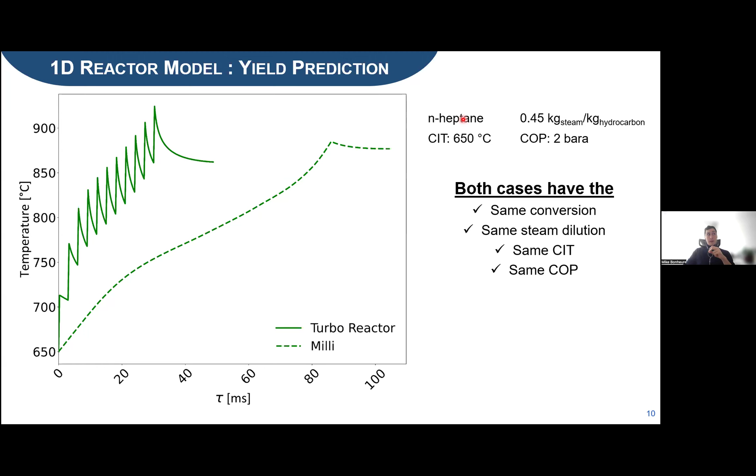The first thing that you see is that the rate at which the rotodynamic reactor can heat up the flow is way higher. Moreover, its average operating temperature is also higher. And that shouldn't surprise, because the rotodynamic reactor heats the flow purely volumetrically, so we don't have to deal with any type of heat transfer limitations as we witness in conventional steam cracking furnaces.

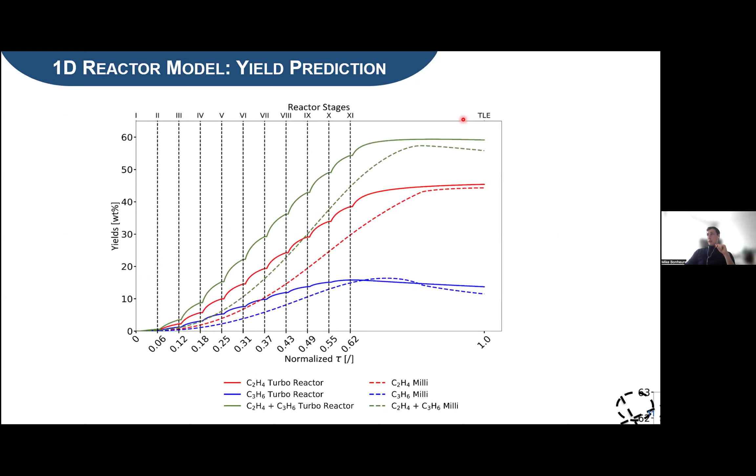How much higher, you might ask? Well, for this specific case, we estimate the increase to be 3.3 weight% absolute. Just to give you an idea, an increase of 0.1 weight% in light olefin yields amounts to approximately 1 million euros in pure profit. So an increase of 3.3 weight% means we are talking about tens of millions of euros of pure profit, simply by reinventing the way we transfer heat to the process fluid.

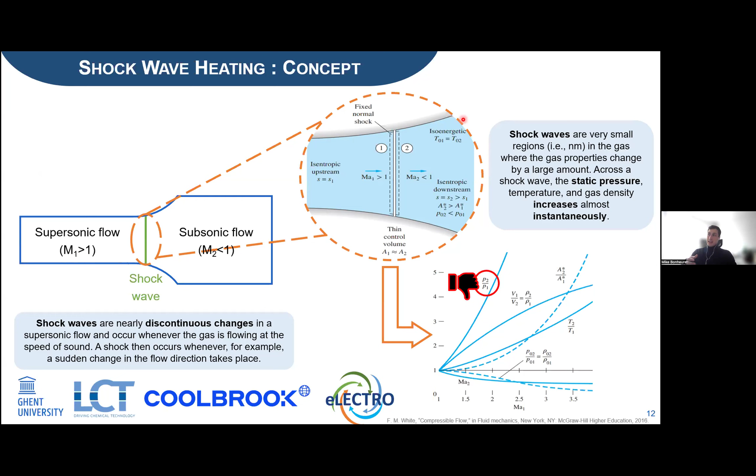For the observing listeners, you might have noticed that besides the temperature increasing, our pressure is also increasing. And if there's one thing we don't want to see in steam cracking, it's high pressures. This is exactly what makes the RDR so unique, because the diffuser blades are designed with a very blunt trailing edge, generating intense turbulence, which leads to high levels of entropy generation. It's this turbulence, this entropy generation, which causes, instead of a pressure rise, a further increase in internal energy through the decay of turbulence into internal energy.

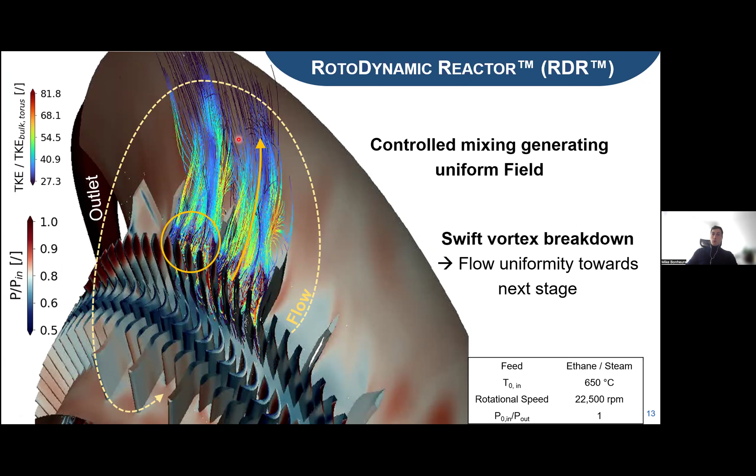So here, just downstream of the diffuser, you see a zone of high turbulent kinetic energy, a zone of high mixing, but it's still confined by the separation walls implemented in the toroidal shape. On top of that, you also see the turbulent kinetic energy breaking down very rapidly. This decay is important to prevent mixing between subsequent stages in our toroid, and to provide a very uniform inflow heading towards the next stage.

Here you can see what our CFD predictions are showing us. What we see is a remarkably uniform static pressure distribution throughout the entire toroid. This uniformity is a direct result of the reactor's very open design, which minimizes pressure gradients along the circumferential direction, but also ensures very consistent flow dynamics and coherent flow structure generation within the reactor.

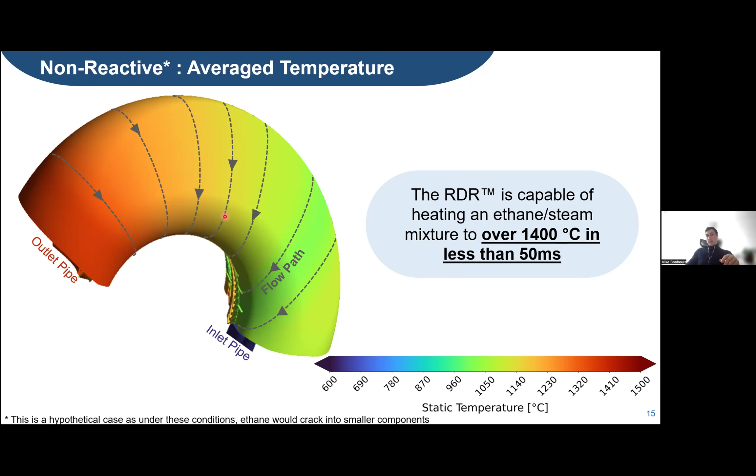Now, the previous temperature profile I showed was a non-reactive case. I assumed the ethane fed into the system is not reacting, because by doing that I was able to isolate and study the pure heating potential of the rotodynamic reactor. Of course, heating ethane to 1,400 degrees centigrade doesn't make much sense.

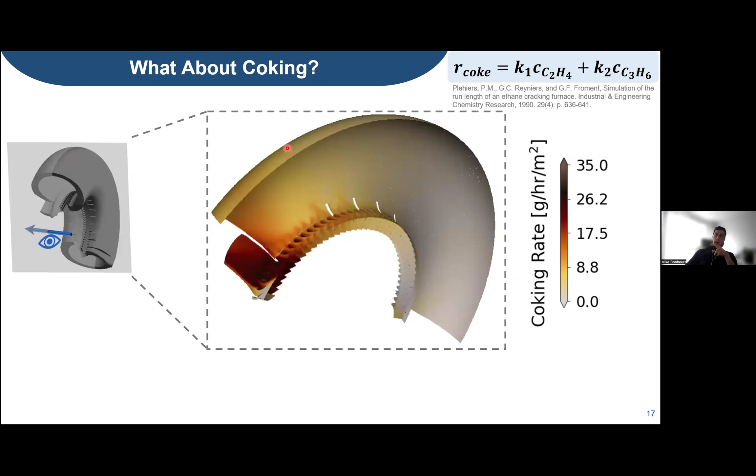Of course, when I say steam cracking, I also say coking. And what about coking? Based on our reactive CFD simulations, we were able to calculate the coking rates in the rotodynamic reactor using a well-known correlation from Plehiers et al. What we see is high coking rates, particularly at the outlet pipe. On average, the coking rate in the outlet pipe is around 20 grams per hour per square meter.

If you look at the peak coking rate, which is also located in the outlet pipe, we see that it amounts to around 35 grams per hour per square meter, which is along the same lines compared to conventional ethane crackers under the same operating conditions as what I've used for modeling the rotodynamic reactor.

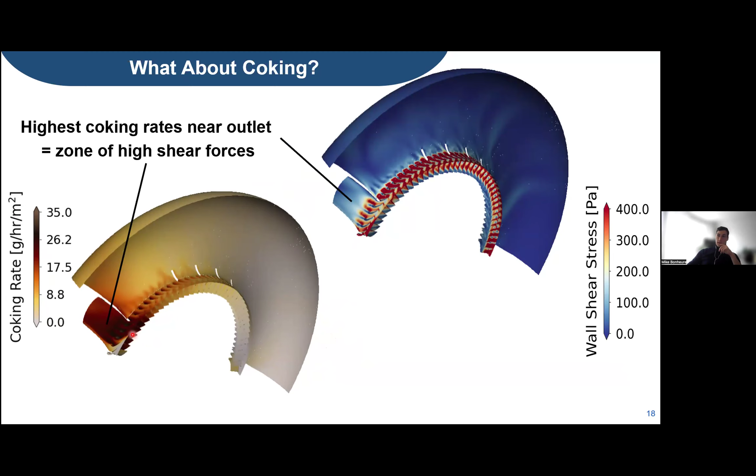But there is one big advantage of the rotodynamic reactor: we are using high-speed flow. And if I say high-speed flow, I'm also talking about enormous amounts of shear stress. So if we look at regions where we expect coking to occur, regions with high temperatures, we also see that our shear stress is quite high. For example, on average, the shear stress in the outlet pipe is around 73 pascals. We even hit, in different regions of the rotodynamic reactor, wall shear stresses easily exceeding 400 pascals. Under these conditions, coking will never be able to deposit on the reactor wall and will simply be swept away.

If we compare it to conventional steam cracking tubes, for example a straight bare tube or a swirl flow tube, we see that the wall shear stress there is around 6-7 pascals. So basically our wall shear stress is a factor 10 higher compared to conventional steam crackers, and any coke that will be formed will simply be swept away out of the reactor.

Now that we have assessed the technicalities of the rotodynamic reactors, it's also very interesting to study its environmental impacts. Because the RDR is fully electrically driven, the carbon footprint of the electricity mix is, of course, a key factor in determining its environmental performance.

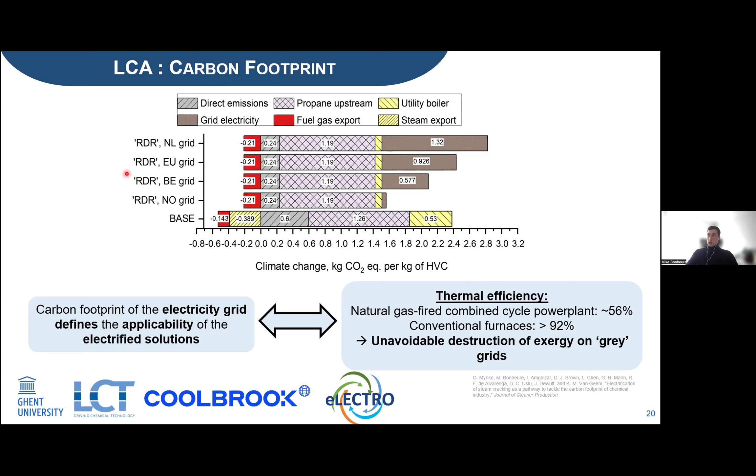This is further highlighted in this slide, where we once again see that depending on the electricity mix, the greenhouse gas prevention capabilities of electrified steam cracking is either good, for example for the Norwegian grid, or is detrimental, in which case it's better to use the base case steam crackers. Of course, when we connect an electrified steam cracker like the rotodynamic reactor onto a full renewable grid like the Norwegian grid, the potential it has to prevent greenhouse gas emissions is the highest compared to other technologies like the low emission or hydrogen-based steam cracker units, with a reduction potential of around 27%.

Also, based on this image, we were able to determine a cutoff point for e-crackers, and this comes down to 300 grams of CO2 equivalents per kilowatt hour. So if the electricity grid is below this number, it's more sustainable compared to the base case. If it's higher, it's less sustainable because of the carbon emissions coming from the energy source.

But there is, of course, hope. Across Europe, the share of renewable electricity has been steadily rising over the past 2 decades, and in 2023 we clearly saw that renewables finally exceeded its production on the European grid by quite a lot. This trend is expected to continue, and as a result the message becomes quite clear: e-cracking is no longer a futuristic concept, it's becoming a very viable and sustainable solution for the chemical industry.

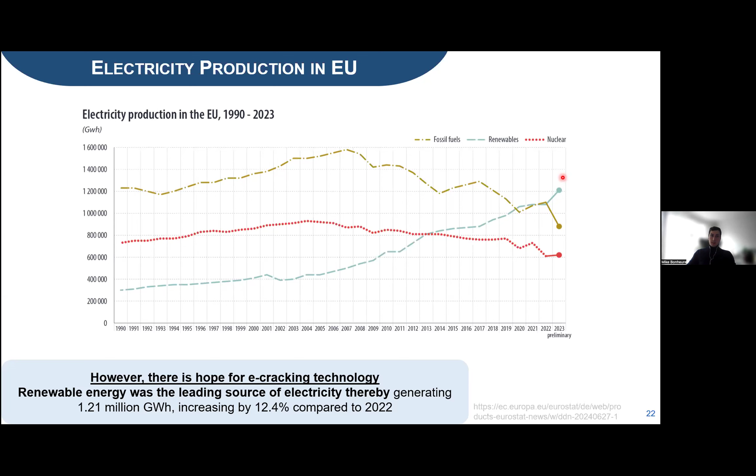Of course, there is more to the story than just Scope 1 and Scope 2 emissions. In a conventional ethylene plant, most Scope 1 emissions come from furnaces, auxiliary boilers, and so on, and we can easily remove them through electrification. However, that's simply shifting our Scope 1 emissions to Scope 2 emissions. But as highlighted in previous slides, our electricity grids are becoming greener, and so by electrifying we are also reducing our Scope 2 emissions as long as we can connect it to a sustainable electricity grid.

What is often overlooked is our Scope 3 emissions, because they can be as significant and in some cases even larger than Scope 1 and Scope 2 emissions. This was clearly highlighted in a major industrial report, and I've taken the liberty to copy-paste a few key phrases, because the message is hard to ignore: Scope 3 emissions far outweigh Scope 1 and Scope 2 emissions, simply because the chemical industry still relies to this day on fossil-based feedstocks. So if we are really serious about decarbonizing this sector, tackling Scope 3 emissions is the biggest lever we currently have, but it's not a quick fix. It requires a full system-wide transformation across the entire value chain of the chemical industry.

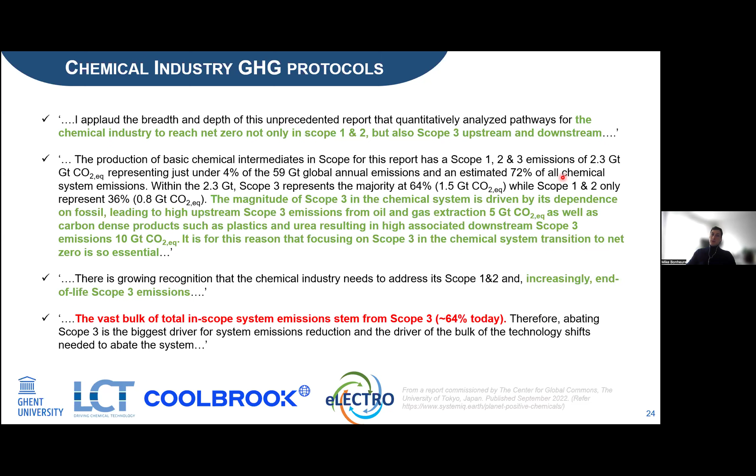This is exactly where the RDR and other e-cracking technologies show a clear advantage, because the RDR delivers significantly higher light olefin yields compared to conventional technologies. It needs less feedstock to produce the same output, and less feedstock means lower Scope 3 emissions. This makes e-cracking not just an energy efficient option, but also a powerful approach for reducing upstream carbon footprint, which is where most of the emissions come from in the first place.

It's really in this light of Scope 3 emissions that I would like to introduce you to the Electro project. It's a European-funded initiative which aims to create a true circular solution for the production of polyolefins. At its core, this project combines two urgent goals in the chemical industry: electrification on one side, and pure circularity, so circular feedstocks, on the other. If you want to address both in one single project, you need to surround yourself with a wide variety of experts, and that's also what we did.

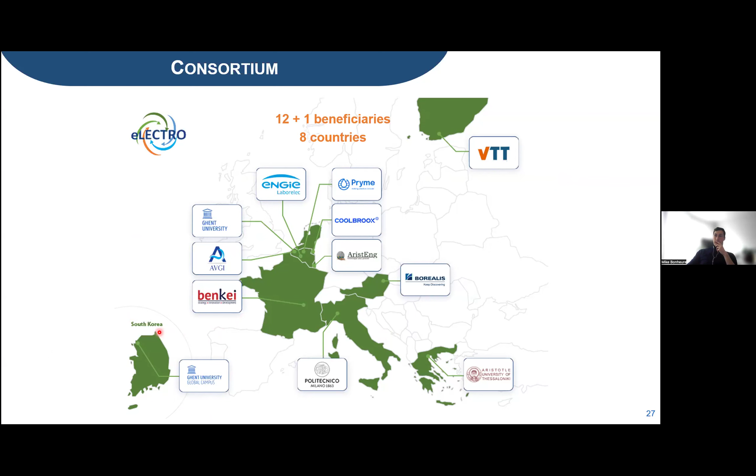Here you basically see the map of our Electro Consortium partners, which includes 13 partners, both in Europe but also outside Europe, ranging from large industrial players to research institutes, but also universities. We even included our campus in South Korea in order to give the project a broader international footprint and to really study the impact of plastics and plastic collection in a region outside Europe.

Now, what do we really want to achieve within Electro? We basically defined four clear ambitions. The first thing we want to do is valorize large volumes of unsorted plastic waste. We are targeting more than 50 kilotons per year using a robust two-step extrusion method that gives us high purity pyrolysis oils, even from highly contaminated or highly mixed waste, and make them suitable for electrified cracking.

The second aspect is, of course, when you have that pyrolysis oil, you also want to make high-value olefin products from it. Think about the production of ethylene, polypropylene, polyethylene, and so on. But instead of using fossil fuel naphtha, we are looking into utilizing the pyrolysis oil from scratch.

And all of this we want to basically do in a fully electrified system. So the entire process that we are currently designing in the Electro project should run on 100% renewable electricity.

Finally, our aim with this entire goal is, of course, to reduce the greenhouse gas emissions by up to 90% across the entire life cycle of polyolefins. So within Electro, we are not just looking at cleaner production, but we are really rethinking how we make and recycle plastics. We're reinventing that entire process from the ground up.

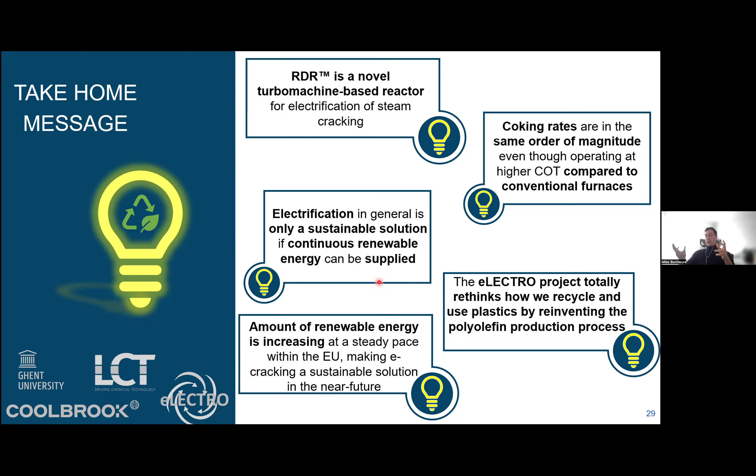It's really about reinventing the way we recycle and reuse plastics, and how to reinvent basically the entire polyolefin value chain.

All of this work would, of course, not have been made possible without the people behind the Electro project, a team of dedicated researchers and partners who are really helping to turn this vision of a sustainable chemical industry into reality. That's the end of my talk. If you have any questions, it's my pleasure to answer them.

Yes, many thanks, Mike. It was a great talk on certainly a novel technology that has the potential to make the difference in the petrochemical industry. As I've mentioned a couple of times, because I'm a little bit aware of this technology, it's one of the really novel developments in the field of PI in the last years. That's my personal opinion.

There was one question in the Q&A field, which is a plausible one in my opinion. Do the shock waves erode the rotor and stator impellers? And how can you prevent that if that's the case? So the question is, do the shock waves impact the blades? Yeah, so the answer is yes.

The shock waves are indeed impacting the diffuser blades, especially, which causes additional mechanical stress onto those blades. But with proper engineering, it's also not new, because supersonic turbo machines do exist in the industry, in aerospace. So it's certainly something we can come up with a solution for. But it's indeed impacting the blades.